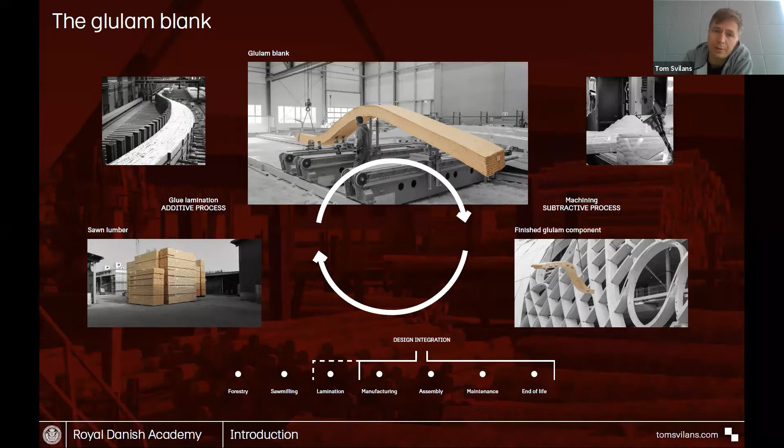And if we look at the bottom, you have this value chain in the wood: it grows in the forest, it goes to the sawmill, it is laminated, it is processed or machined, manufactured, then it gets assembled and maintained and disposed of at the end of its life. So how could we expand the role of design to go one step backwards, not just in controlling the shape of the final piece, but looking if there are any opportunities in this lamination process or in this glulam blank? So that was the main question.

And the PhD developed that through these three main components. So on the one hand, if we are highly information and data driven, we need to look at how we model and how we represent and encode these parameters, factors, considerations from glue laminated timber into our models. So how can we come up with computing models that give us useful information about what is actually going on in the glulam?

Then we also need to look at the materialization, at the top, which is exploring this design space. So if we start to engage with making, how can we make it differently? How can we challenge the way it's made right now? How can we look at some limitations and see how new technologies can affect the way we make these highly geometrically complex objects? And then the final part of the puzzle is on the bottom right, which is the design implementation. So once we know how to model and represent and draw these things, once we have an idea how to make them, how do we actually integrate them into design projects?

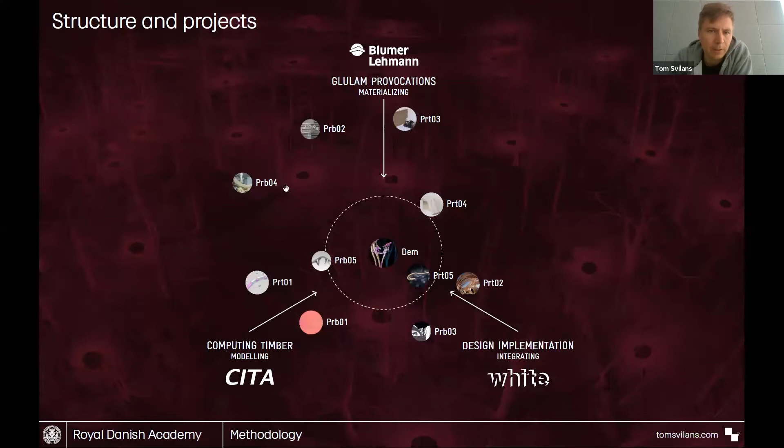So from the PhD, the result was that on the modeling side, it led to the development of tools and workflows, which were eventually turned into plugins and libraries that kept track of a lot of the parameters and lamination sizes and relationships between curvature and geometry and joints, into tools that designers could use quite easily, but that nevertheless gave good and important feedback at the beginning of a project to anticipate

complications. And on the bottom, it was also a matter of saying, well, wood has all these properties and fiber directions, so how do we see them in a model? So much of the time we can have the same geometry, but there's this extra layer of material information now, and so there need to be modes of representing that, either through color mappings which represent vectors of grain directions or different visualization techniques to find out, if you cut across the end grain of the wood, that's very different than if you cut along the grain. There's different implications for durability and strength and so on.

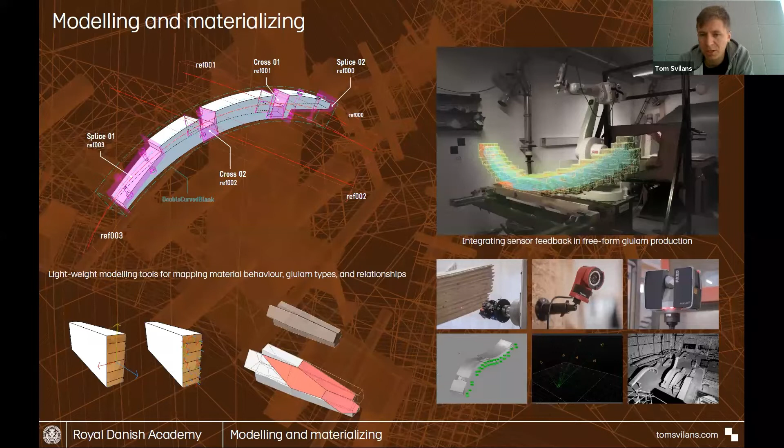And then in the domain of materialization on the right, we explored, now that we have these complex forms, which you can't just put on a table or put on a CNC machine just like that, how do we actually deal with them and how do we keep track of what is going on during production? So we looked at different ways of integrating 3D scanning and motion tracking and LiDAR scanning into the process. So how do we connect the digital model to the actual physical thing that's being produced to make it easier to produce it more accurately?

And then also on the making side, glulams are usually made by cutting lumber into strips and then gluing it together and then maybe bending it and then machining it, and then that's it.

Whoops, let's get rid of that.

And then the question here was, well, there's all these processes within that value chain. What if we just thought of some slightly different ways that we could do things? For example, on the right, what if we glued together small offcuts or small pieces in the rough form that we needed? So using some of the waste from other processes, and it's just much easier to glue and deal with straight, short elements. Then using our digital fabrication, we can machine the perfect surface from this object. So it's giving the offcuts another life before they are turned into sawdust.

And then we use that as the formwork for laminating the continuous fiber along the outsides of the beam. So we have maximum strength on the outsides of the beam where it needs to be, and then the inside is more variable. And then we also use the piece itself as formwork. So it was looking at what this would look like. And then on the bottom is the result.

And on the left, this cross-laminating branching blank was asking, well, in a lot of these highly complex lap joints, you're cutting away half of the beam. What would happen if, when you're making the glulam, you put the laminations in layers so that one layer passes through, the other one stops, and vice versa? So you interleave the connection, and then the connections are just at the ends, end to end, which in some situations might be easier to deal with. So it was just trying to challenge or rethink existing ways of making glulams and developing some possibilities.

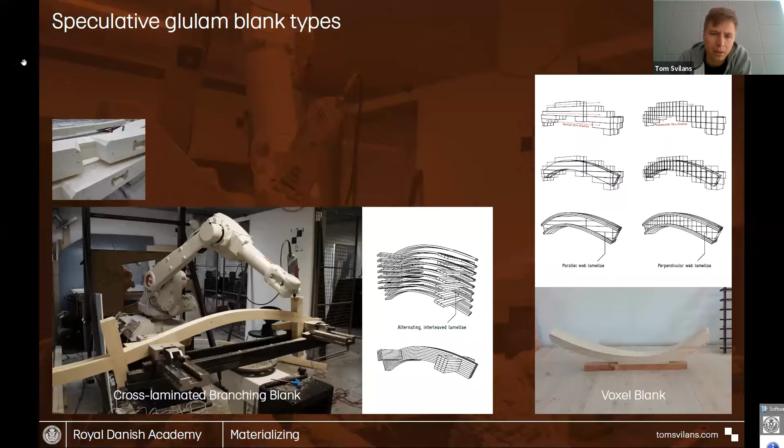Go to the next slide. And then that also turned into what happens if a glulam splits. What are the implications of that? You get a lot of splitting forces, so you have to laminate in a cross-laminated layer at that connection, or figure out some way to hold that in. But also, from a design side, what is the spatial potential of that? If now you can have glulams that start to split and go off in different directions, it might be an exciting spatial possibility.

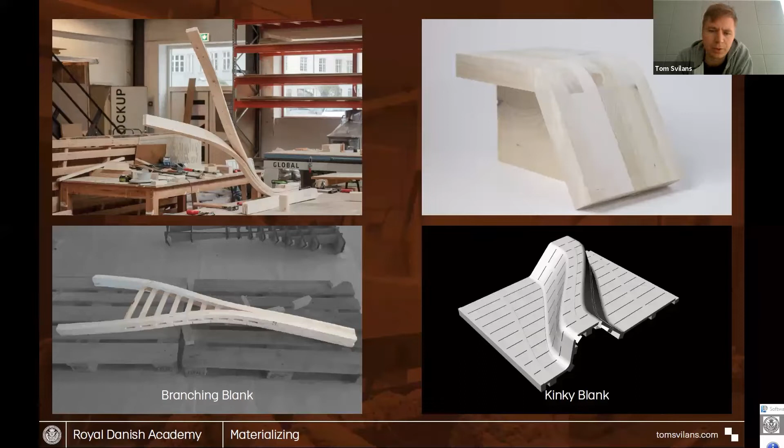And then what's called the kinky blank is when you have largely straight elements and then only small areas of very tight curvature, where you start to cross-laminate between layers to approximate the form. And the one on the right, that principle is used all over, in furniture, for example, for making objects. It's also used in some constructions where the forces aren't as great. But this was trying to formalize that and make this family of different types of speculative blanks.

Then in the design realm, there were a series of projects that looked at what are the spatial implications now that we have these different types of glulams, now that we have this way of working. How can we push the spatial aspect of it, and how can we also stress test the tools and the techniques on more architecture projects? So on the left there was the entry for the 2017 Tallinn Architecture Biennale, where we just wanted to push it as far as we could.

And although the rendering looks like a big bowl of noodles and it's super complex and crazy, the key thing there was that we had a grasp of every single piece within that through the modeling framework, and that was what helped to convince the jury at least to give us second place.

Because on the one hand, you had this massive complexity, but then we could also show that we had graphs and other ways of representing and managing this complexity, by connecting the overall design to each and every glulam, and then also every glulam blank. And so even in this complexity, we could know exactly what's going on with each member and what is the thickness of wood we would need to make those curvatures and so on and so forth.

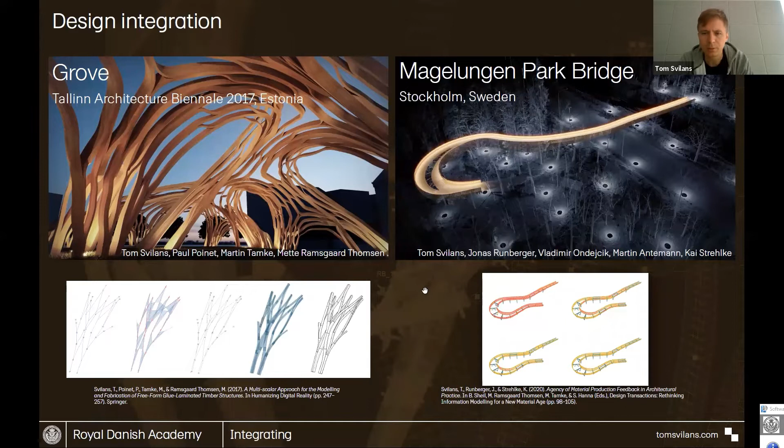So the game there was: let's not change the design geometry. Let's see how, just by changing the types of glulams we use and the material composition, we can lower the complexity and therefore lower the risk. And both of those projects, we wrote about them and published them.

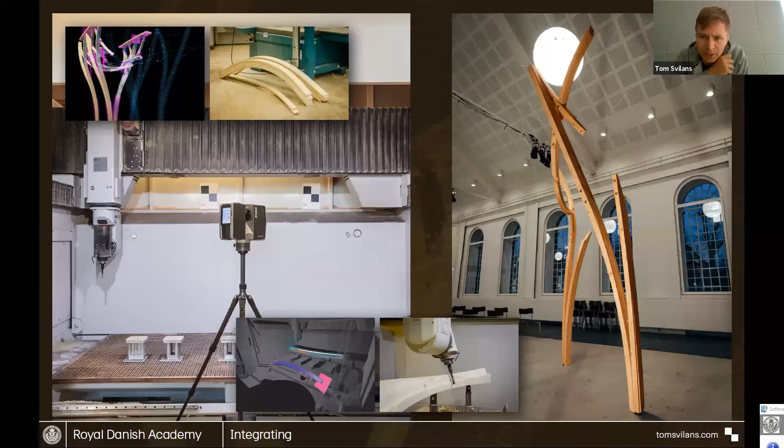And then following this was the final model for my PhD, which took the design of this bridge and kept all the complexity. And then this was a test of saying, okay, now I've got these modeling tools and workflows. I've got these 3D scanning and making workflows and methods. How do we now try to integrate all of this into one workflow and demonstrate that it can be done?

And also, this took a small section from that bridge and kept the high curvature and complexity, and then I went through an exercise of making it. So gluing all the blanks, which you see up top here, putting them on a 5-axis machine. On the bottom, you can see the 3D scan of the machine and where the piece is, and how we use the 3D scan to align this non-orientable geometry. And then you see the 5-axis machine starting to cut some away, and then on the right is the result.

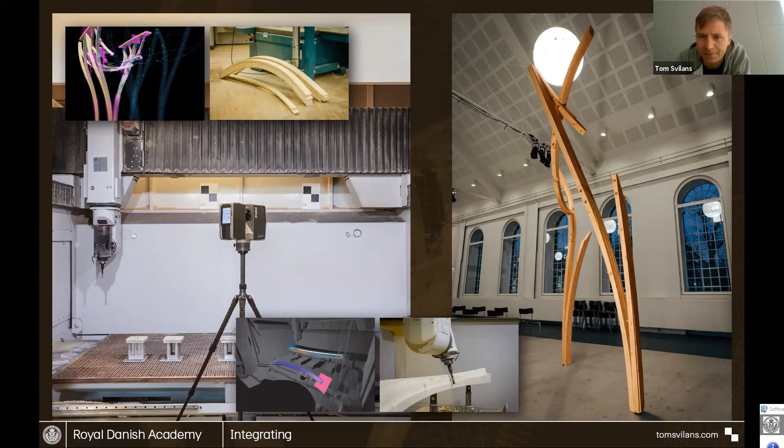And I'll admit there was supposed to be a third leg, but I ran out of time, and it had to be put in a box and shipped to Copenhagen to be exhibited. But that was the kind of result of that.

So the outcome of that was, as I mentioned before, the PhD was about developing this as a material practice. So saying, well, now what is a digitally augmented material practice in timber and in freeform structures? It has to live between design and manufacturing, and if it's augmented by digital technologies, then those play a strong role. So the contribution was proposing this new way of riding somewhere between architecture and manufacturing and bridging the gaps in between. That was the kind of outcome of that.

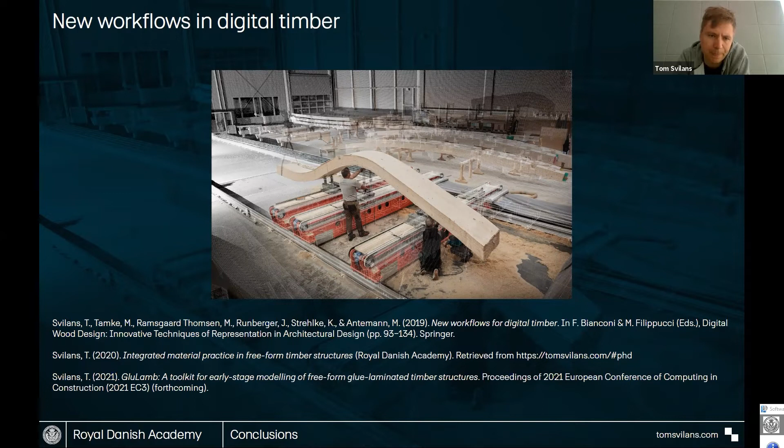Okay. So after the PhD, as I mentioned, at the beginning of the PhD the goal was to see how we could extend the scope of design further back into the value chain, into lamination and manufacturing. And then the question was, how can we go back even further? What happens in the sawmill? What happens in the forest? What are some interesting developments here?

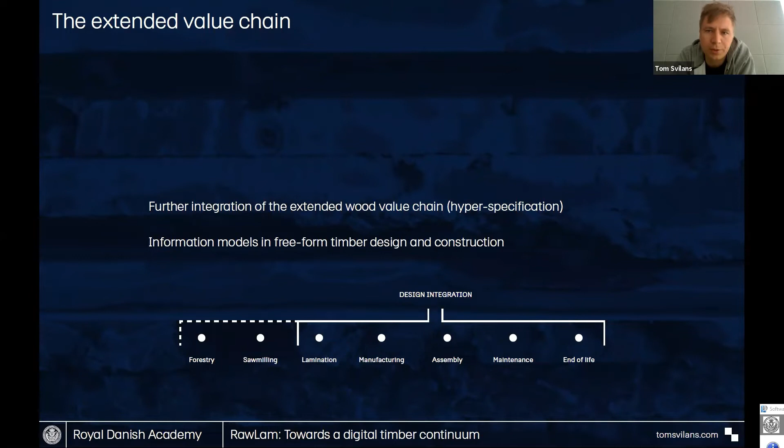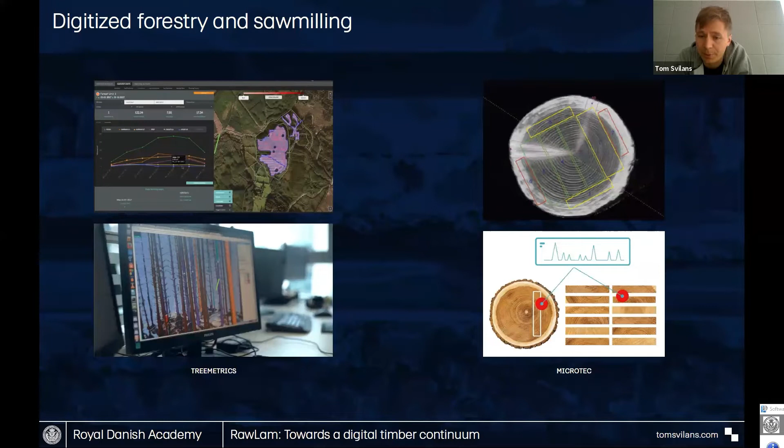So in this way of thinking, we developed this project that we call RawLam. It's obviously based on glulam, but it uses this technology and this data to ask, how can that change design, how can we start to put this into our designs, or engage with all of these data sets and all of this information that is there?

And one way was, well, if we design something like a beam or a column, we see that it doesn't always behave uniformly. You'll have more stresses and more forces in different parts of the beam, especially when you have something that's bending, because you have to factor in the bending, and with joints, you need different quality. You need high quality material around joints so that you can have very strong connections.

How can we start to map these qualities into our designs, and therefore have this kind of hyper specification of material performance and high resolution grading of the material in our design elements? Because as you probably know, you can get different grades of material, but it's usually like this board is this grade and that board is that grade. But here, what we are curious about is, could we say in a board that this part here is this grade, and this other part on the same board is that grade?

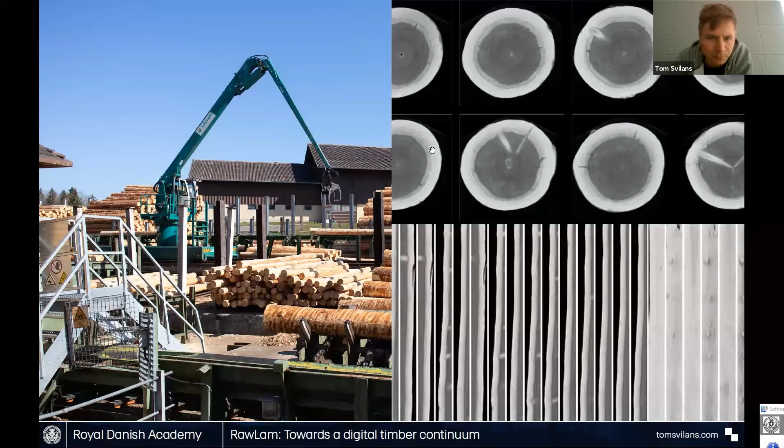And so we set out to try to make something that would express this idea, going from the log and the CT scan at the top here, identifying where are the knots, where are the different parts of the log that we should allocate to different parts of these elements. We just drew a very simple kind of tripod structure just to create some curvature and some different scales and different sort of joining conditions. And then we mapped the demands on this object.

So where it curves, we need higher quality material. On the outsides of the beams, we want higher quality. On the insides, it's fine if the quality is not as great, because in principle there's less work happening in the material. And then also, as I said before, the closeness to the joints. So around the joints, we want high quality material. So when we combine all these different mappings, we get this

combined map of demands. And then we look at the log and we say, well, it's not about just using the best material, but it's saying, where can we use low quality material? Where can we expose things like the wane and worse parts of the log? And where do we have to use high quality? So it's not about extracting the highest possible quality from the log, but rather saying, can we start to negotiate between what's available and what we need? We don't want to use high quality material in an area that just needs low quality material, for example. So that's the story.

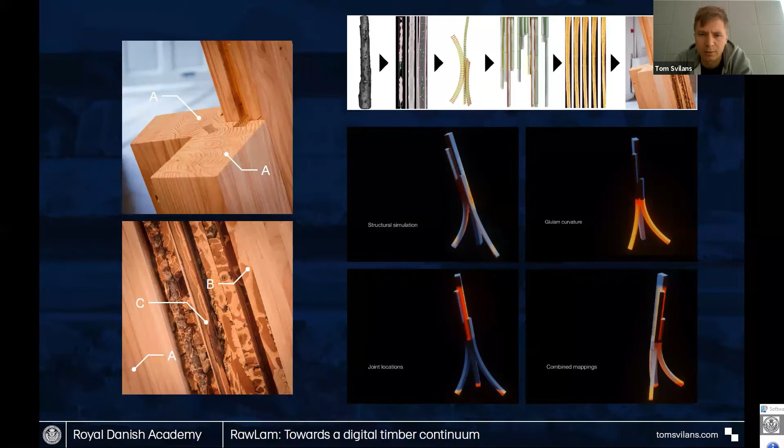Then also, as the bottom left image shows, it also led us to wonder, well, it might also have a different expression, texturally or spatially or aesthetically, when we start revealing the rawness of the wood and integrating that into the design, which we can do once we have the CT scan, and we can start to be very precise about which part of the log we put where. And that leads to maybe a not super polished, clean timber language, but maybe something that's a bit more rustic, a bit more haptic, tactile, and so on and so forth.

And that's, I think, probably the trickiest part right now, is keeping that link alive, right? Keeping the precision that you have in the model all the way through to the execution. And I'll show that in the next series of images after this, with a very recent project that highlights the importance of this.

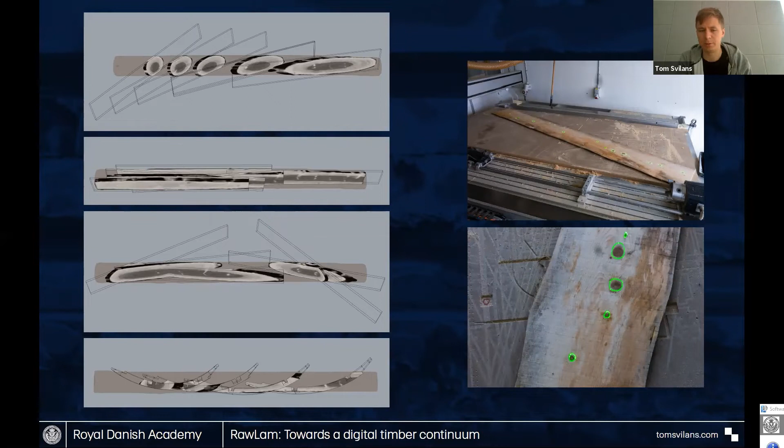And on the right, it's the importance of keeping that link. How do we maintain our grasp of the material in our hands and the digital material in the computer? And that just resulted in kind of another version of the same sort of tripod, which was just trying to improve on the process and integrate more scanning, and try to get a little bit more precise and tighten the tolerances.

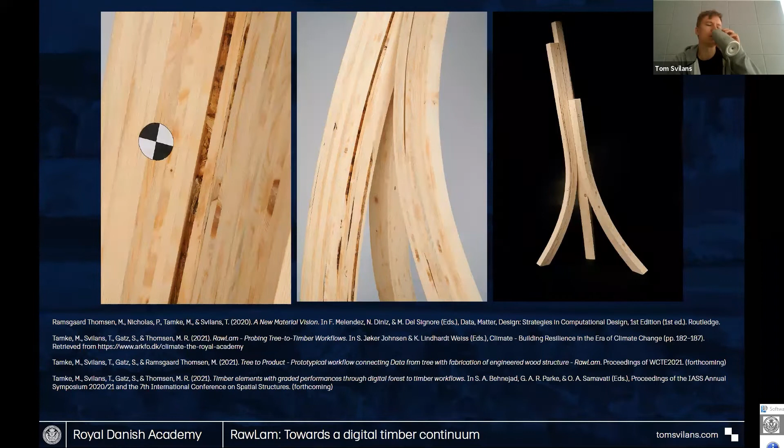So, am I okay on time so far? Should be. Okay. Yeah. Perfect.

So the reason I probably sound quite tired is because I'm in Umeå, which is 13 hours north of Copenhagen, where we just finished installing this yesterday. And this is for an exhibition here in Umeå called Architectures of Transition. And it's the next sort of step in this project. And it's about scaling up and also just trying to tighten the information links.

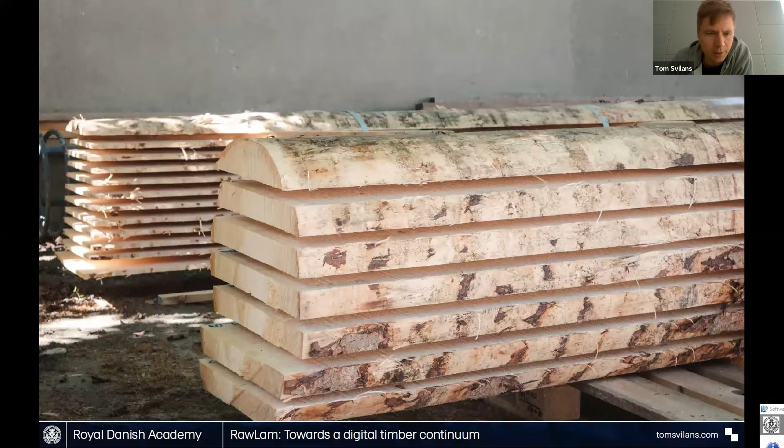And whereas these other previous projects just had one log to deal with, this has 4 logs, and 4 very different logs that we had to deal with. So it's about trying to grow the complexity and see how we can push it to the next level. So we drove up on Sunday and we installed it yesterday, and now it's sitting upstairs in the gallery space. So this is what arrived at CITA.

This was sawn. Before it was sawn, it was CT scanned, and then they sent us the data, and they sent us also the cutting pattern. So we had an image of a cross section of the CT scan data, and then lines that showed, this is where we cut the log. And then they delivered the cut logs or the boards to us, right? So this arrived at CITA, and these are the 4 logs that were used.

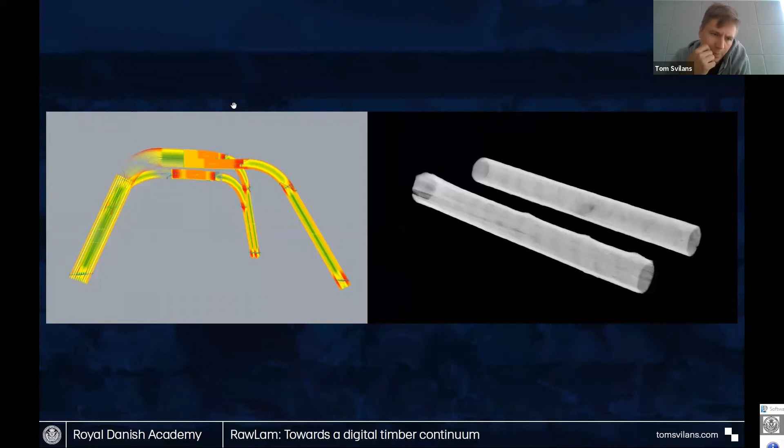Then we had this design, which was, again, just trying to scale our little tripod into something that stood. So it's starting to get legs, starting to become a structure. It's not a building yet, it's not holding anything super heavy. At the moment, it's holding itself, but it's trying to now make something more complex, more parts. So where before we had 3 elements, now there are 13 major elements, a combination of straight and single curved elements.

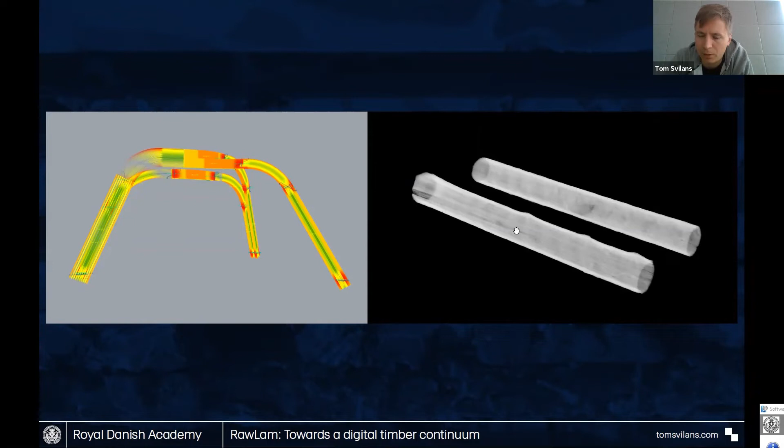And this image on the left is the same kind of mapping that we saw earlier. The red means that we have lots of demands in these areas, so mostly around joints, and the green means that there are lower demands. And then on the right are the two CT scans of two of the logs. So the question is then, how do we take this data on the right and map it onto the left?

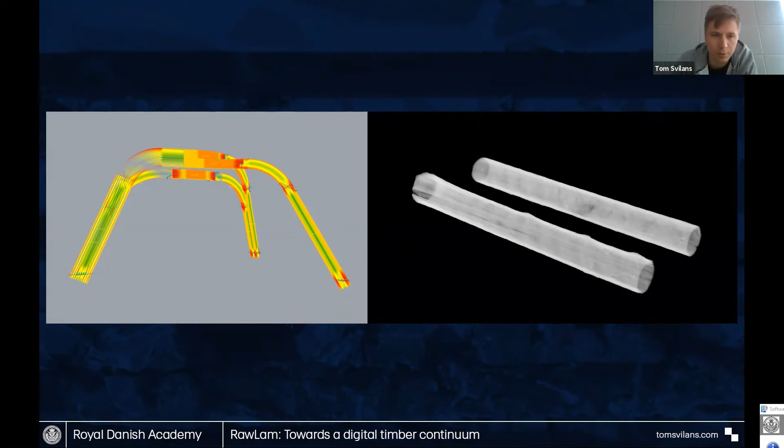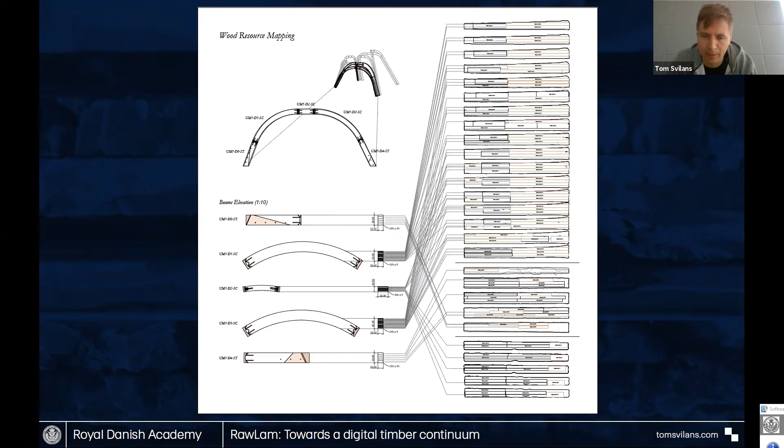So 5 elements with their connections, and each of them are broken down into the size of lamellas, and then exactly which board and which part of the board those laminations come from. So logistically, it's quite tricky because it involves so much tracking of where is what at what time, and which board has which lamella that goes into which glulam, and what order do the laminations have to go into the press, and so on and so forth. So it's a bit of mental gymnastics or informational gymnastics, but that's the idea.

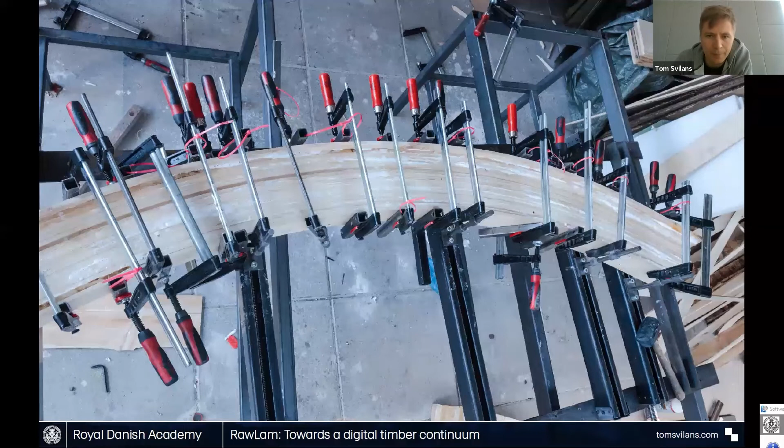That is the pressing. So we had to build a stronger press, which also needs further improvement, so we steal less clamps from the wood workshop. I think we cleaned out about 70% of the clamps in the school for this, which was quite a lot of fun.

And that's when it's not being pressed. That's a formed glulam still in the press, and in the background you can also see templates, so we could kind of just check the form, and also use that to align it in front of the robot.

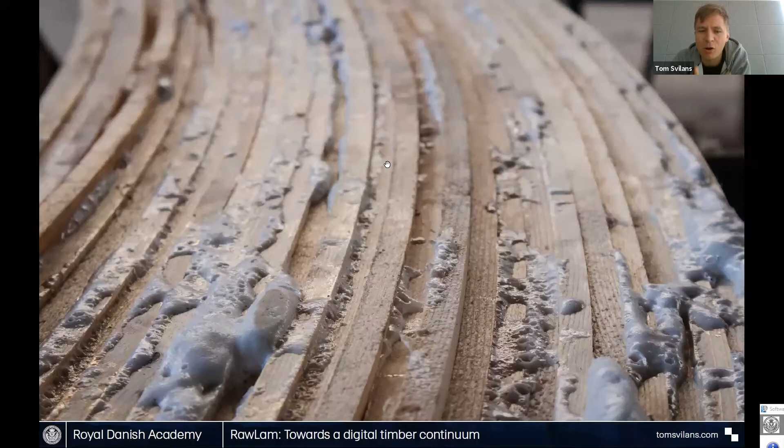So this is when it's glued. It's a polyurethane glue that foams when it contacts water, so it expands and kind of makes this mess on the top. But it's kind of beautiful in its own way. It's another rawness that I think is part of the process.

And the holes are kind of pre-drilled with the robot, and then on the bottom there's Anagnos keeping an eye on me as I drill those holes deeper for some steel rods to go into.

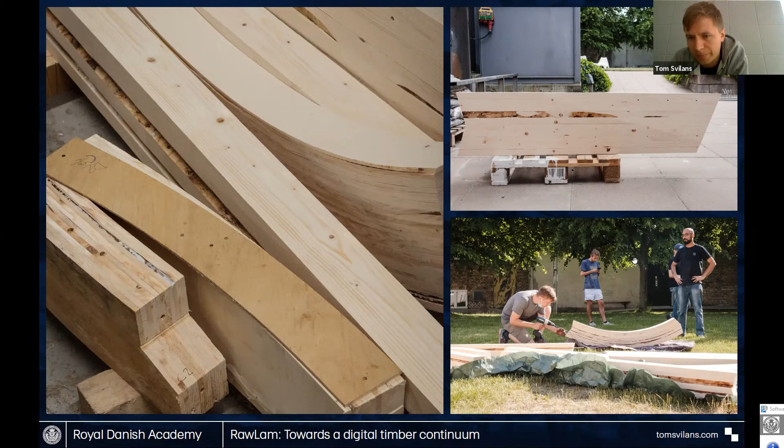And Tim in the back is checking Facebook to see if it's got any likes.

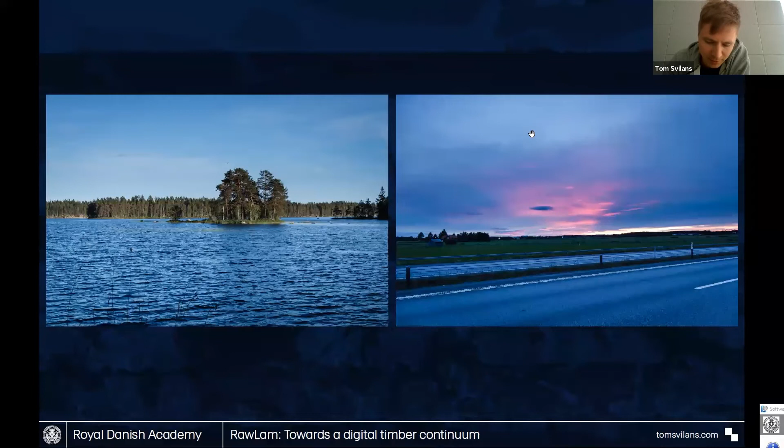These are some photos of the drive from Copenhagen to Umeå. It's holiday photos. It's absolutely beautiful, the lakes and forests and cliffs. And on the right is just as we were entering Umeå at about half an hour past midnight. So it's close to the summer solstice, so here it never really gets dark. But it's a pretty amazing northern landscape here.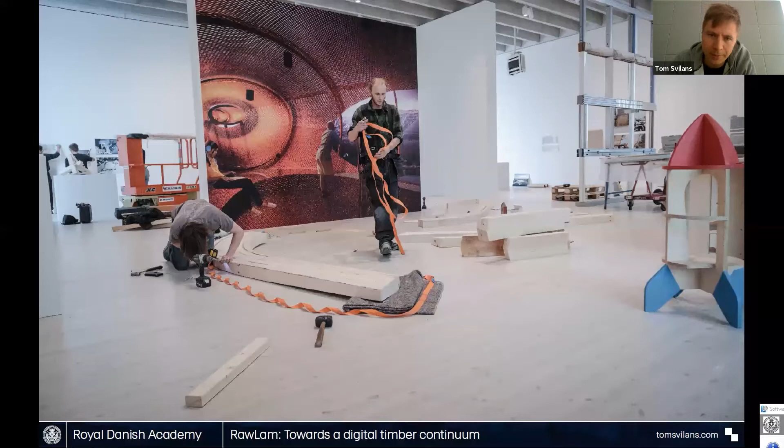This was yesterday in the gallery, where we started pre-assembling these pieces. So connecting the straight elements to the first single curved elements and connecting them in chunks so that we would be able to assemble them easier with the gallery staff. And this is Jack, also from CITA, who drove up with me to help. And here he is assembling one of these legs that's split together.

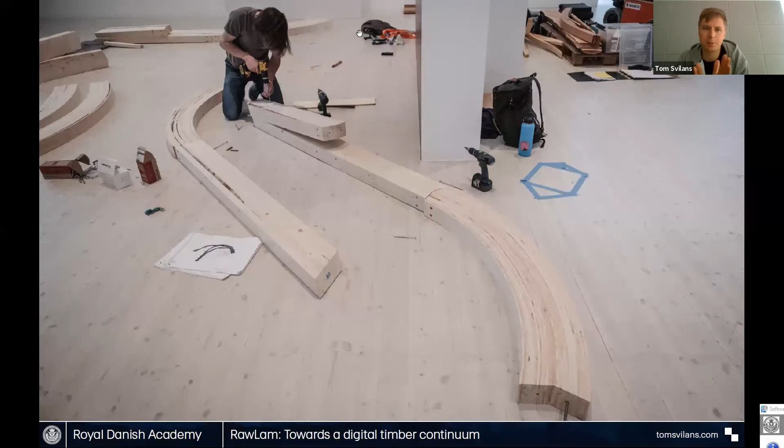So there's a surface that's machined off between each leg, so they fit together. There are two or three steel rods so that they are positioned correctly, and then it's pulled together with some very long wood screws that are about 200 millimeters long. So here are two of the legs, kind of good to go.

That's the A0, and this one is the C0. This is what we call the fatty, because it was the fat glulam, and the big one, which was very challenging just to manipulate, and also it took a very long time for our little robot to machine it, but we got there in the end.

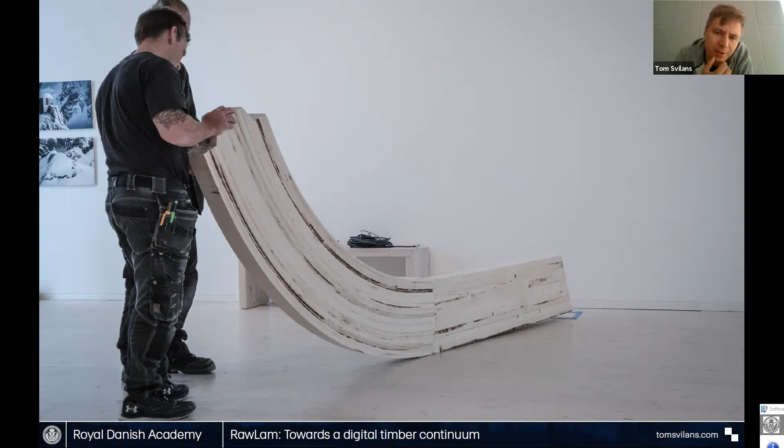And what I liked while we were setting up is the pieces themselves, individually, they're interesting by themselves as objects, as little assemblies of parts, because here you don't know what it's part of, but it hints at something. By itself, these volumes are quite interesting, even with small curvatures and quite simple cuts. I think they can be quite interesting objects.

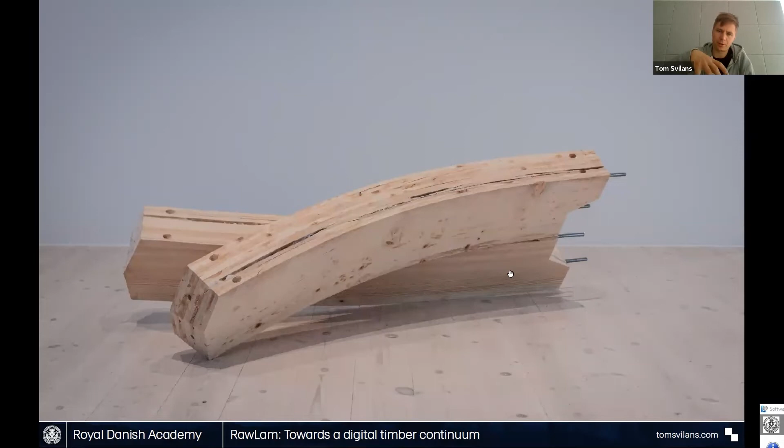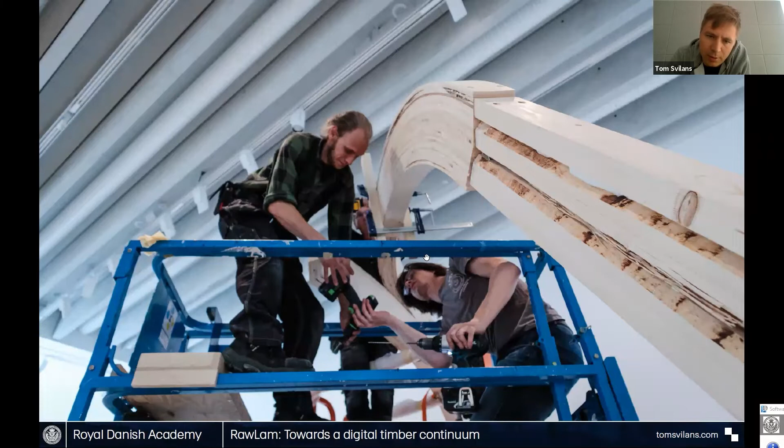But here we see the metal rods in the ends of this pre-assembled component that goes into this really thick glulam. And in the middle there are pins as well to align these two, because these basically sit on top of each other, and then they're connected to the big beam. And then they diverge into the legs. Okay. So this is us supporting the big leg with the split and then attaching the other legs. Just trying to manage that on site.

Here you can see also offsets, just because of small inconsistencies in the information or misreadings. This is because one of the values was rounded to a millimeter. We ended up with 2 extra laminations that made the section thicker, because each lamination had to be, I think, like 6.5, but we made them 7. But that little distance accumulated into a bigger thickness. So again, having to be so precise and so mindful of every little relationship has been a very tricky aspect of this project.

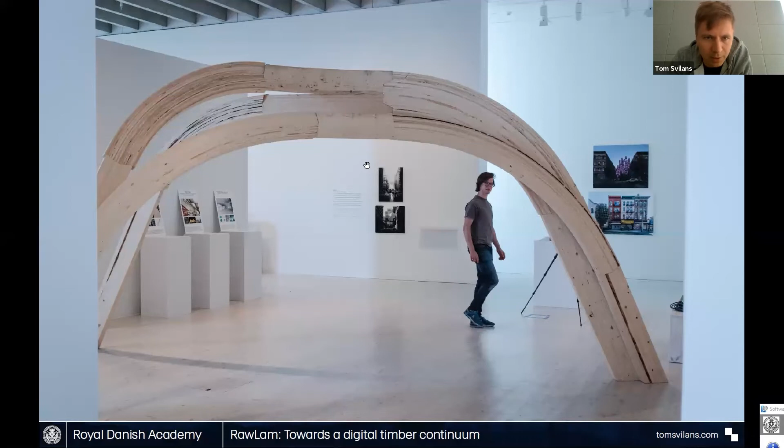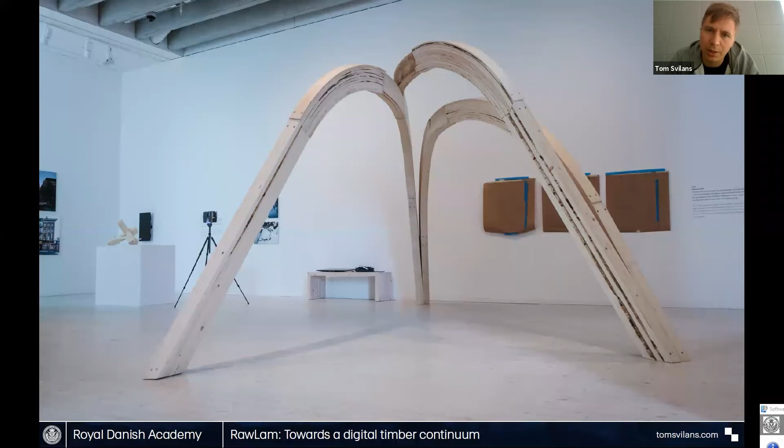And then this is the assembled piece. That's Jack looking very happy and relieved that we put it together. Here we're 3D scanning it, and it just looks like this tripod with an extra frame, expressing the rawness of keeping the wane in the beams, and showing that glulams don't always have to look super smooth and shiny. They can have a sort of ruggedness and texture to them. And yeah, just some close-ups of some of those joints.

So again, you see the offset in the sections, and this is intentional because to deliver this, we could only work with single curved elements, because double curved elements with our current setup at CITA would have been extremely challenging and next to impossible. So we had to break everything down to single curved elements. And then we said, well, they're oversized anyway, and with our robot, it doesn't care which direction the joints are cut or at what angles. So we can just take that misalignment in the joint.

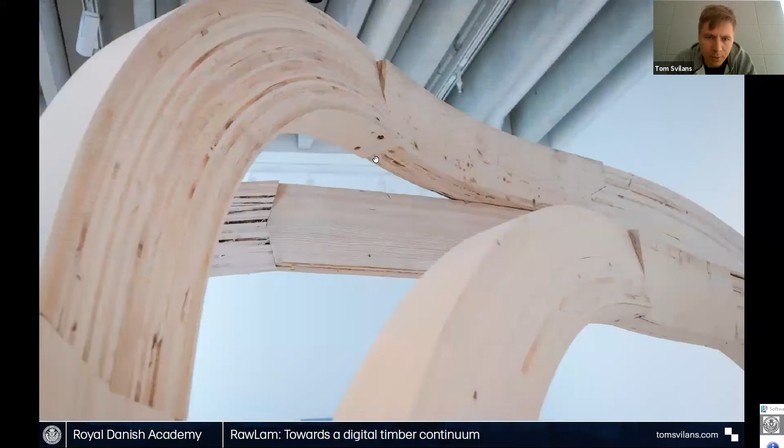So these bird's mouth cuts fit together at an angle, so that the sections can start to describe more three-dimensional and doubly curved gestures in space. And we kept the corners, not to try to hide it, just to say single curved elements connected sort of disjointedly. The laminations change. You see the one up here, it's laminated vertically because it bends to the side, and then this one is laminated horizontally because it's bending down. So you have very different expressions between the faces of the glulams, and where they meet, you see these transitions. And then more close-ups there.

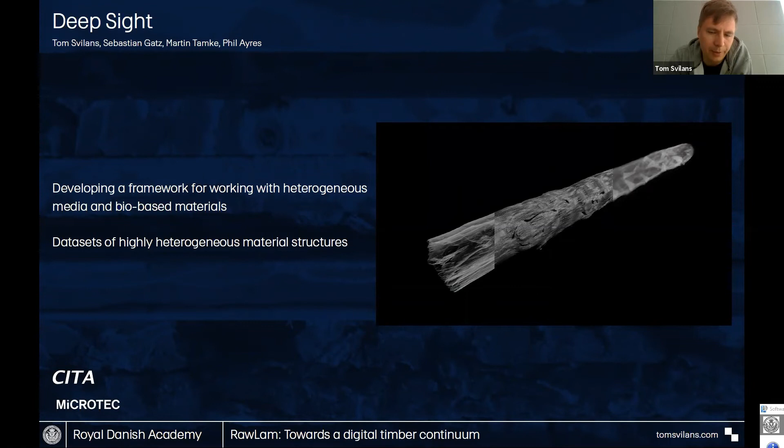And then the final thing I just wanted to say, the thing that came out of working with all this volumetric data, is it's a challenge to the way that we model things, especially if we're moving towards a bio-based economy of construction. And in CITA, that's what we're very interested in, where we have projects with cellulose and mycelium. These CT scans present very interesting opportunities. We can understand materials at literally a deep level, and see inside of them. But that also challenges the way that we, as architects and designers, model and represent things, because we're so used to describing surfaces of things and boundaries of objects.

And I think it's an open question, and something that's important to think about, how can we start to engage with the heterogeneity of materials and come up with new ways of working or thinking about objects, not as boundaries of inside and outside, but just the change in density or gradients of change in space, in volume. So that's the other sort of parallel wondering that we are doing, that comes out of all this work with timber.

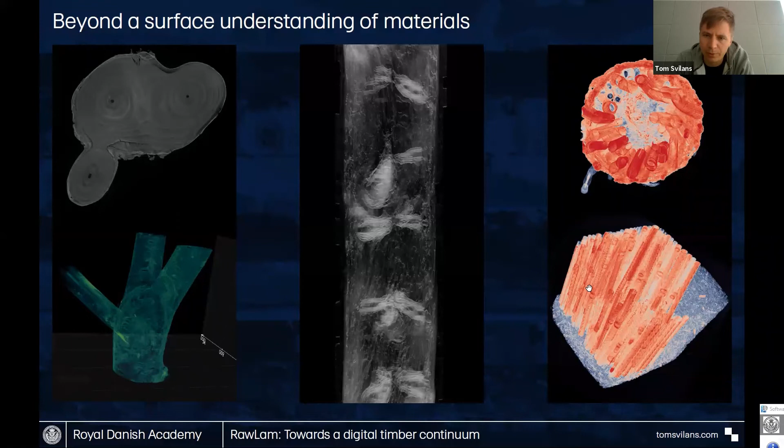The PhD was funded by the EU, was partnered with Blumer Lehmann and White through InnoChain and the European Commission. MiCROTEC has been helping us with data, and then the last project is here in Umeå at the Bildmuseet.

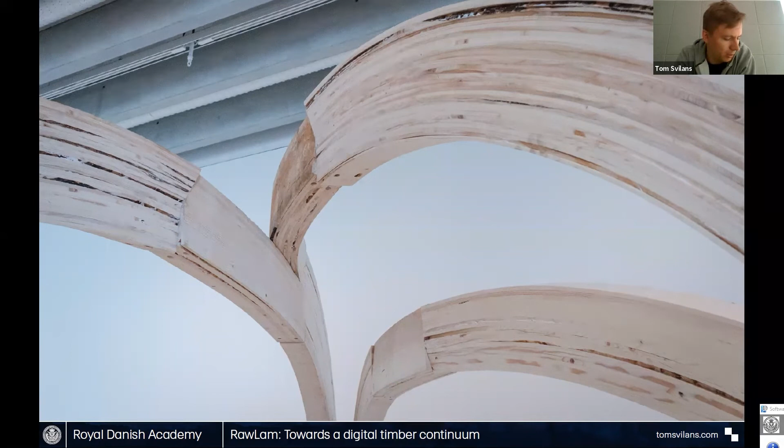Yeah, I completely agree that it's really important to have this relationship with industry. For me, my PhD was based on that. I couldn't have done the same stuff without those connections, and it was incredibly educational. I learned an incredible amount just by working closely with them, because often in the university you might think of how something is done, and then you go to industry and they say, yeah, in theory that's how it works, but these are all the problems, this is how we deal with it. You get these different insights into their problems. I think it's really important to engage with them.

But there are also barriers to that, no? And I think one of the biggest ones is incentives for industrial partners to engage in collaborations with universities. Sometimes they really like it because it's good PR. Sometimes with a PhD project or some other research project, they will get a very helpful output, something that they can put into practice and use to develop their business. Sometimes there's funds from the EU or subsidies from the government that they can use. But it comes down to finding this middle ground of what is interesting for the company and what is interesting for the research.

And for me and Blumer Lehmann, that was the important part. I wanted to go to their workshop and make glulam structures and play with their machines. That was not possible. So we found the common ground of the sensing, because that was something we could test during one of their productions. That was something that could help them in some cases, and for the research that was also interesting. But it took a little bit of dancing.

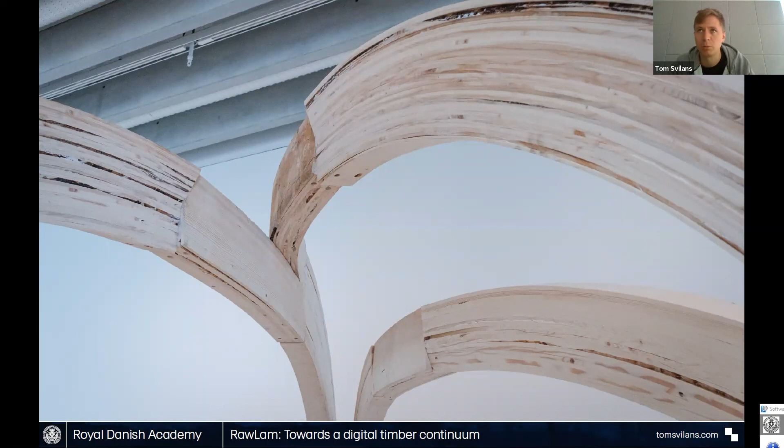We've been talking to some Swedish partners as well about the issues in forestry, and a lot of it comes down to politics, small landowners with small forests, and then these big companies that own 200 sawmills across Sweden, and the ecologies of it as well. So it's a very multifaceted problem, of which we can only really try to nudge one area a bit, or a couple of areas, I think.

Yeah. Realistic. I think the other discussion is about laminated timber. The glue is actually still having too much of an impact on the ecology, so there's some place for debate there too. But I think it's really very interesting. I'd love to see you continue these things that you're building with this optimistic view of making.

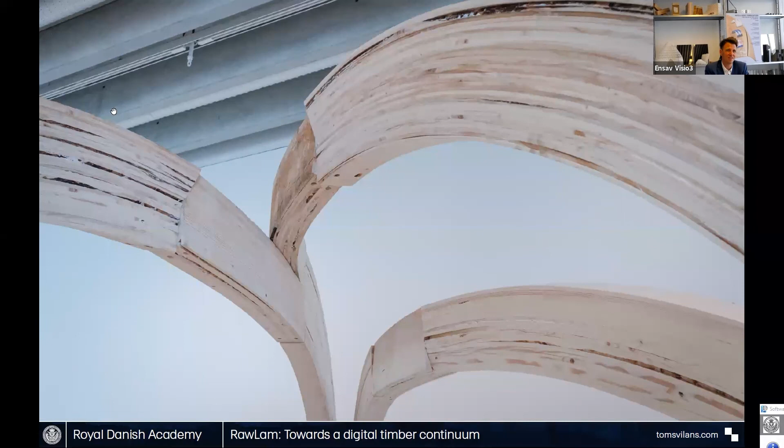And by the way, I saw your pavilion in Barcelona last Friday. Okay. Well, what did you think? Or maybe we save that for another chat. Yeah, we save that for another chat. It's actually quite okay, so don't worry.